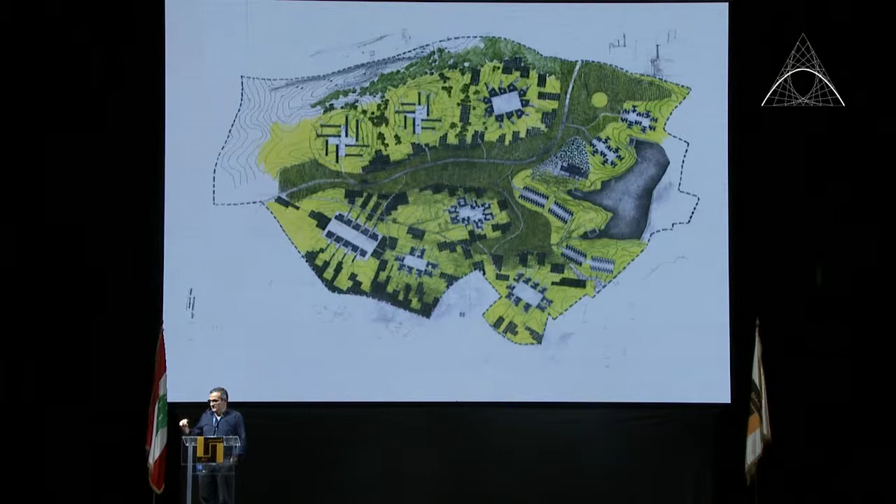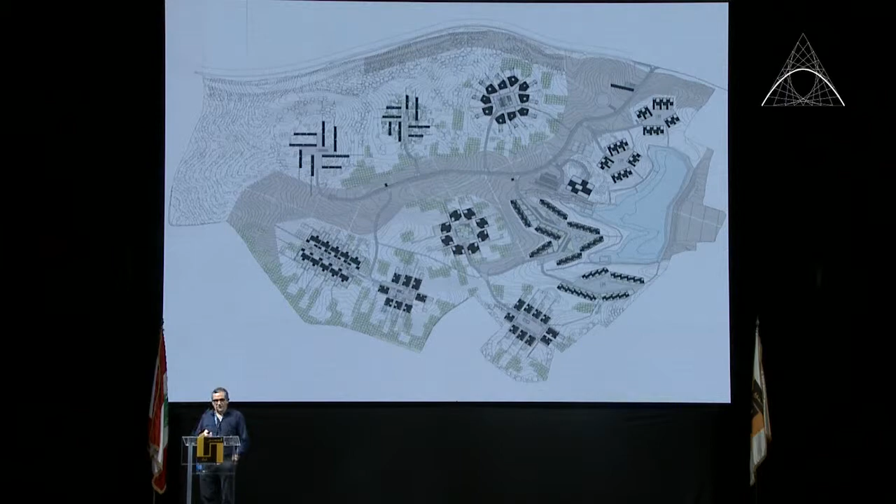So basically, as you look at this master plan, you see a valley line with a plantation of about 8 hectares of wine, mostly Shiraz and Cabernet, if you care for the detail. Then there's a water basin at the end, and a clubhouse. This clubhouse functions as a kind of anchor, and later became a hotel with a restaurant and spa and other things. So this master plan is a finalized idea.

You see these 8 hectares across the valley line are planted with vineyard, and then there's also olive oil—the green dots are the olive oil plantation. Then we have the different houses which we created in the master plan, encircled around a perimeter, and we invited different architects to work within this perimeter.

These swastika-shaped houses are by Carrilho da Graça, an architect from Portugal. The other ones below, like a boulevard, are by Peter Märkli. The square ones in the lower part are by José Paulo dos Santos. The rest, including the clubhouse, are by us. And in the upper part is Sergison Bates from the UK—also a wonderful team of people.

So this is just a rendering of how it looked. I think it's not all built now—it's built about 30%, 40% maybe, but it's pretty much looking as it is now. So we started from this premise of having this kind of productive land.

One of the things that's terrible, I think, in resort master planning is that developers try to maximize the perimeter of road, so the road ends up divided by house after house after house. Here we tried with this idea of creating clusters instead, placed on the high points.

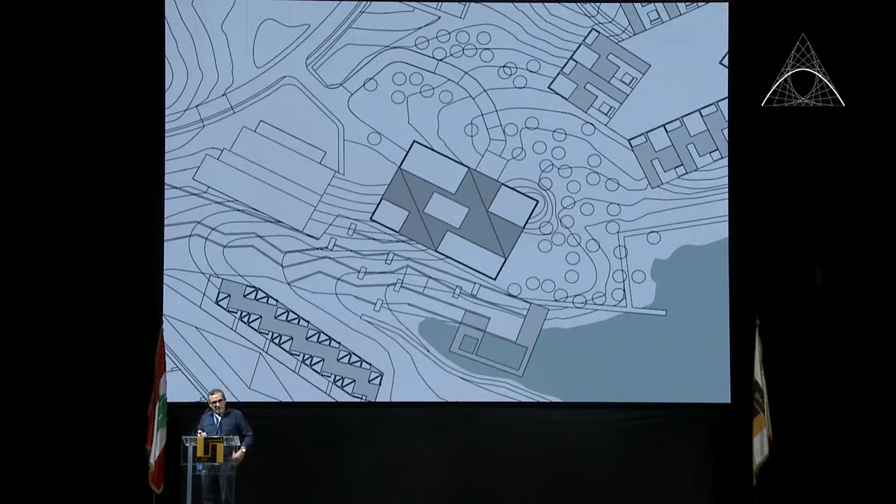There was this idea of this pool ring and this space as well. Not all of it was done, of course. The clubhouse that we designed, which is now called Land Hotel because for fiscal reasons it became a hotel, is basically a little iconic building that should spearhead the process.

We start from the premise of a kind of walled patio space. It's important in the landscape culture in Portugal. You see this walled-in countryside, this idea of marking a boundary, a white boundary around the house. In the landscape, you see this usually to keep the cattle, etc.

So we start from this premise of developing a building with a strong nucleus that would sprawl to these patios, some of which would be industrial patios, because after all this is a wine cellar, a wine production center with a facility combining a spa and a restaurant. But its main function is still wine production for those 8 hectares. 8 hectares is actually a lot of wine.

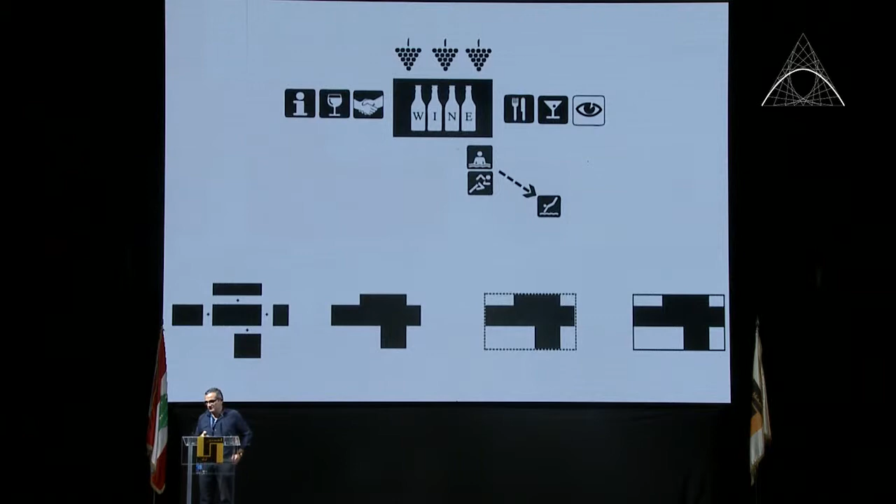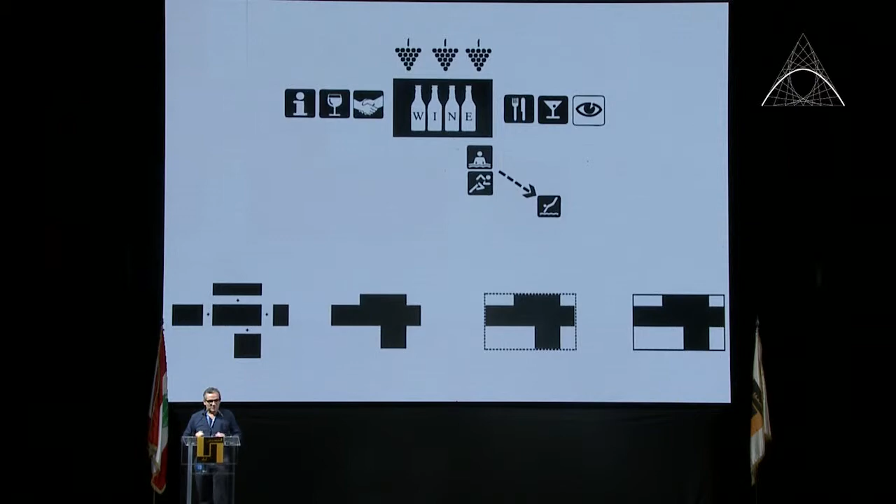You don't imagine for one moment that these people, these 130 units, if they were drinking from those 8 hectares, they'd be in Alcoholics Anonymous, I guarantee you, because it's a lot of wine. So, basically, these are the plans. You see it's a set of 5 patios, and the one in the center is the industrial patio, where there is the wine production. Then there is a restaurant, and of course, you see here some of the sections.

The high patios are, of course, for the wine cubes, stainless steel cubes. And the other patios are also shedding a little bit from the wind, etc. And you still have these views towards the lake.

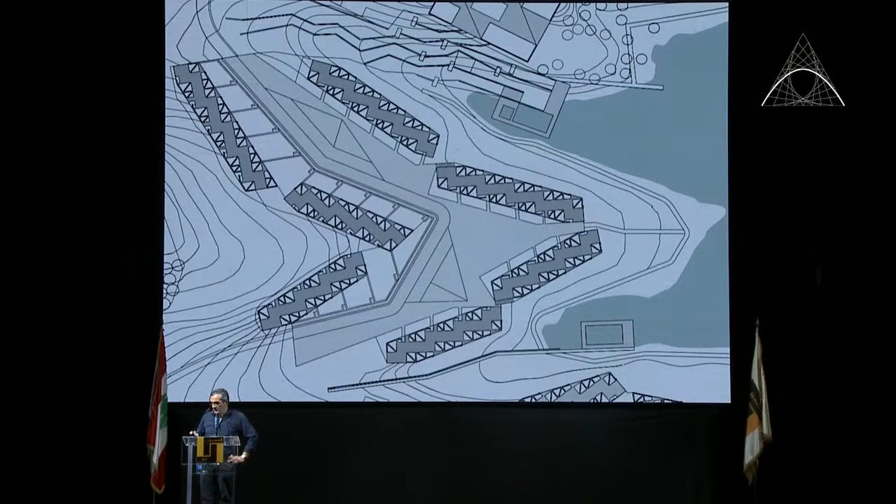So here are the townhouses. Townhouses are these structures also sort of embedded in the landscape. We wanted to minimize road car traffic, so we only have one road. So the ones from the lowest part near the basin walk and go down from the patios, and the others go up from a little set of stairs.

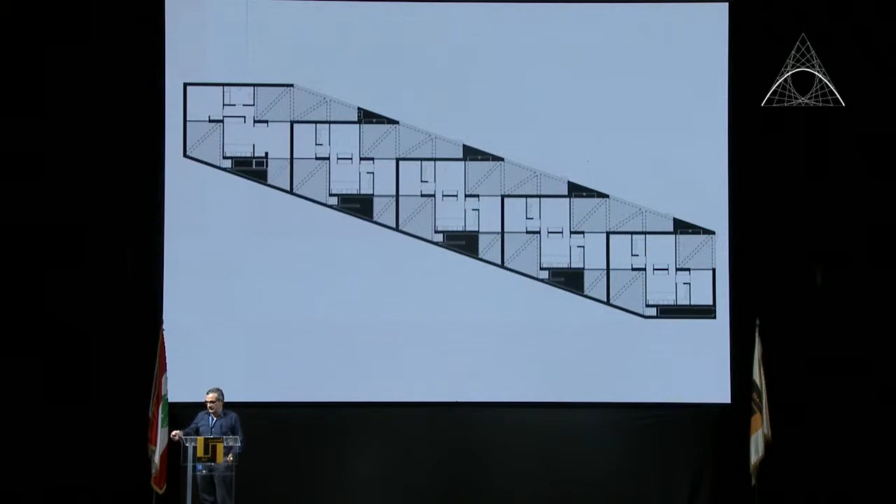Some schemes of the houses, how they work, with patios above and below. Here you see the typologies. They have these sort of patios also to give some privacy.

This is always this complex thing between real estate and tourism. It's a different issue, quite interesting how it works. So here you see the patios to the back where you can go down from this side, and only one road access to both rows of houses.